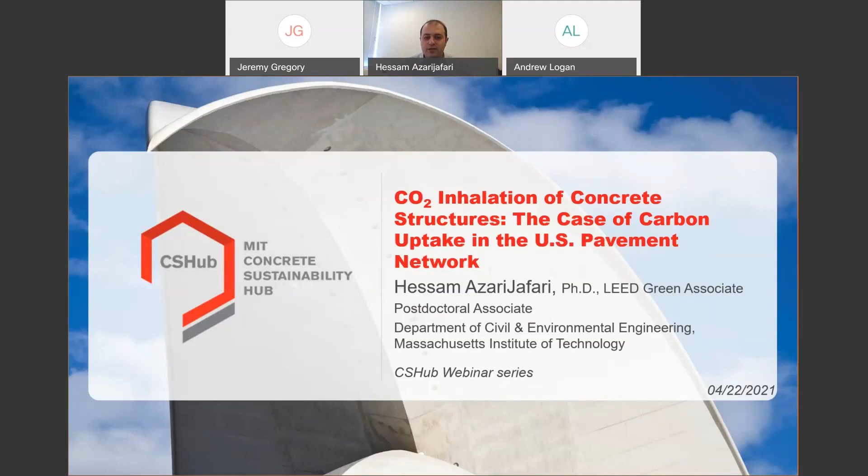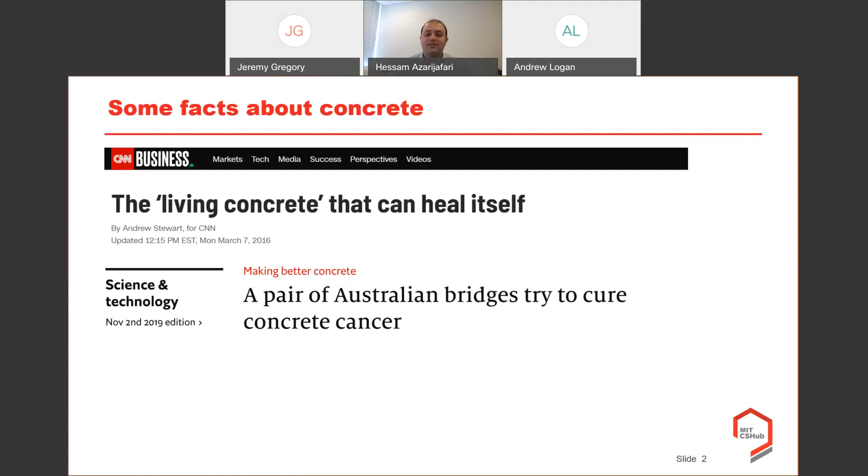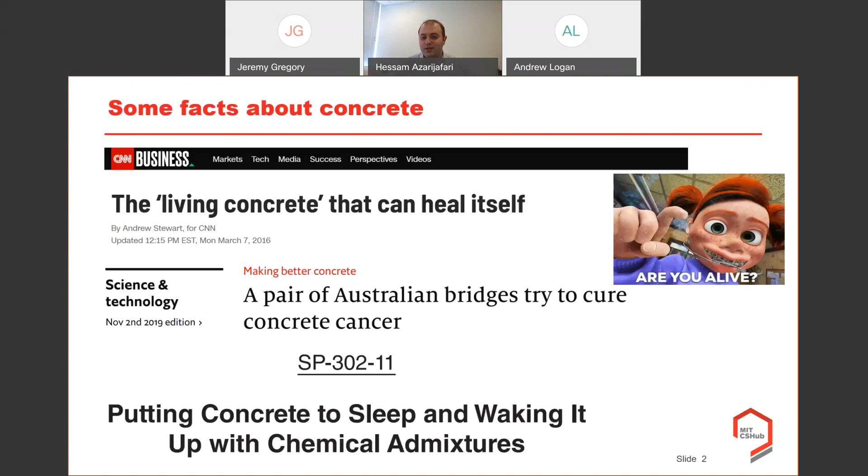I would like to share some facts about concrete with you. You probably saw in different news, press, or research publications talk about living concrete - concrete that can heal itself, the self-healing capacity we can give to concrete. Or, for example, concrete cancer, alkali-silica reaction, where concrete can catch cancer and we have to cure it, and some researchers are working on that as well. Or we can put concrete to sleep and wake it up with some chemical admixture. All these things make me think: is concrete alive? Well, if you want to hear my answer, it's yes.

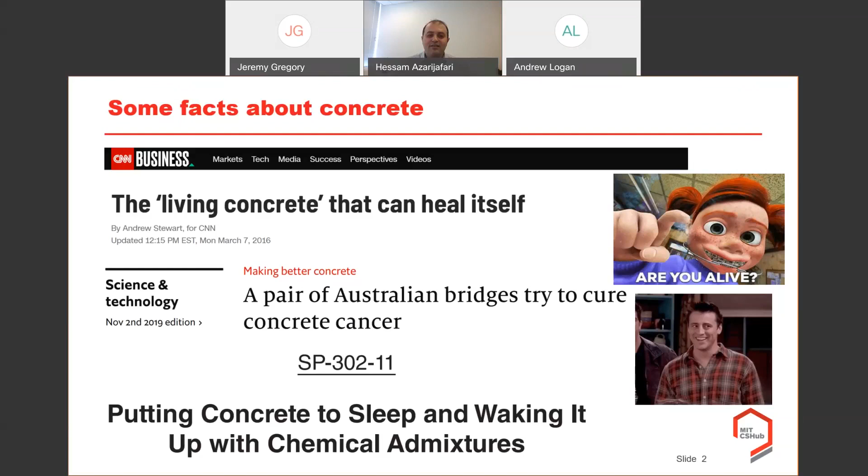When I saw all these things that are similar to many different creatures, I think concrete is alive, and concrete in fact breathes. How can concrete breathe? It can inhale some CO2. So today the topic of discussion is the CO2 inhalation of concrete structures.

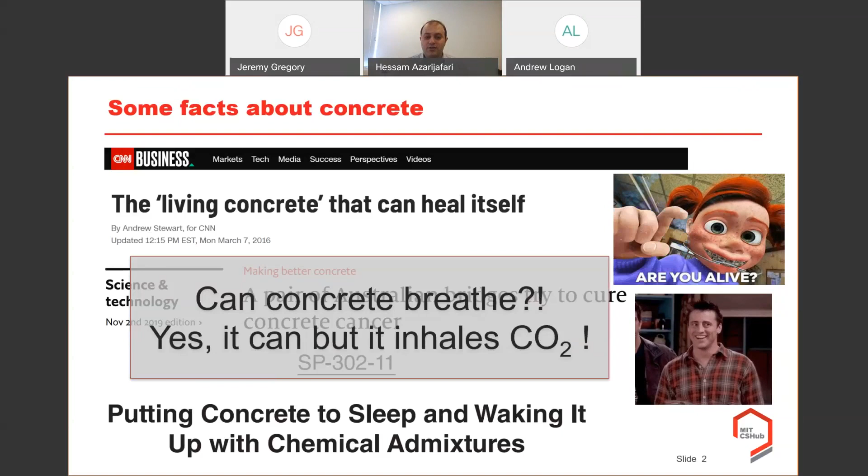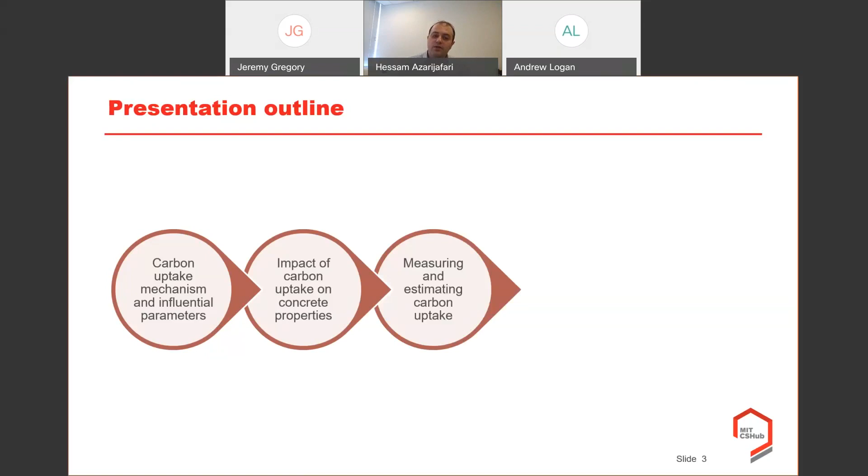And to do that, I would like to start briefly with our presentation outline. First, I will talk about the carbon uptake mechanism and the influential parameters on concrete carbon uptake. Then I will talk about the impact of carbon uptake on concrete properties, more specifically the hardened properties of concrete, and then different methods for measuring or estimating concrete carbon uptake, and how it has been accounted for in LCA - life cycle assessments - or environmental product declarations under the PCRs, more importantly the European PCR that has provided a guideline for that. We'll go through that as well. And at the end, I'll present the case study we've done based on this information, on the US pavement network.

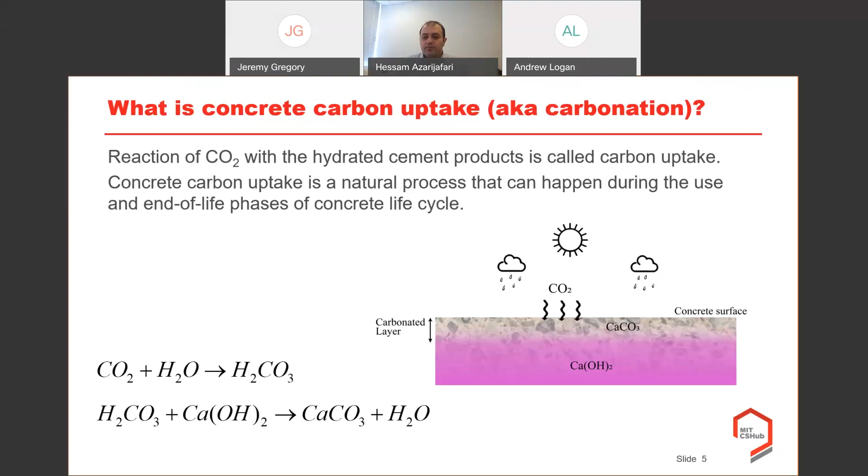Here I'm going to talk about different factors that can influence the intensity of the carbon uptake in real cases. These factors can be majorly divided into two categories: internal factors, like the concrete mix design, the constituents, the binder type and content, the water to binder ratio; and external factors such as the exposed surface area, the exposure condition, or the climate conditions. I'm going to bring examples from different studies that have experimentally investigated the impacts of all these factors on concrete carbon uptake and how it can differ from a control or plain concrete mixture.

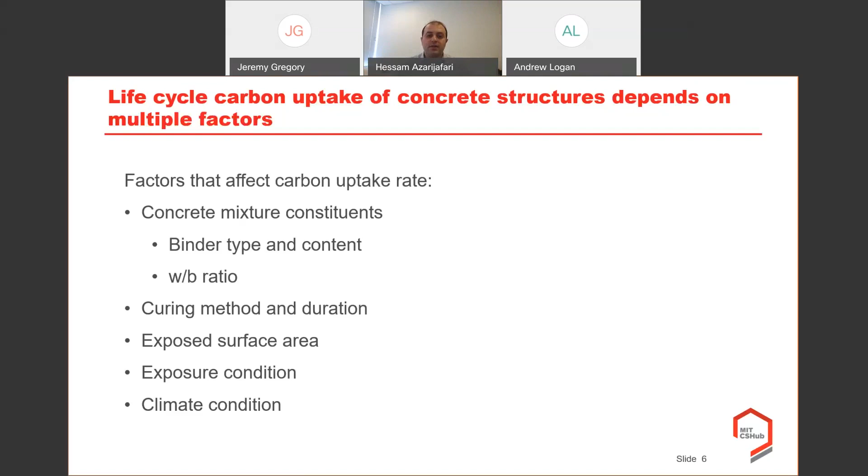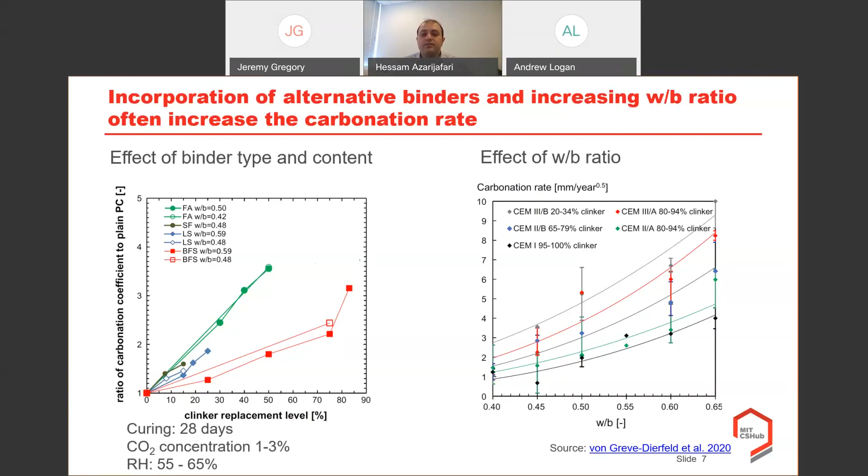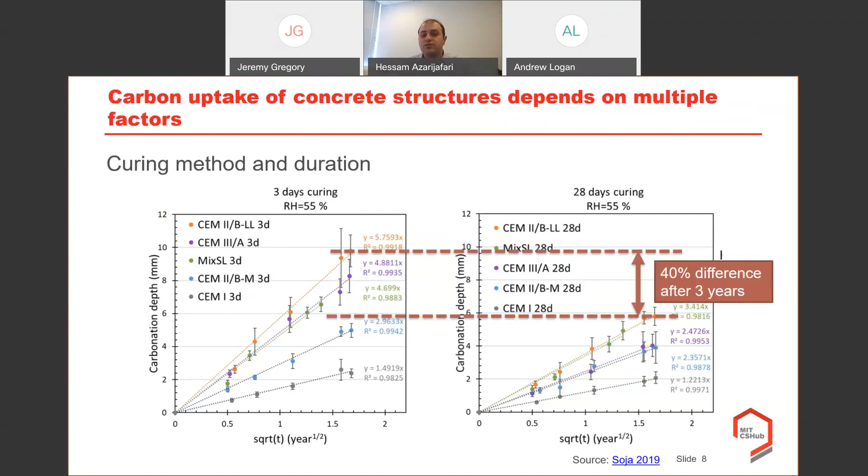What I would like to emphasize here is that in real cases, the CO2 concentration is quite different from experimental lab setups. More importantly, in rural neighborhoods and rural areas, the CO2 concentration is very close to 0.03%, as opposed to a lab condition that can be up to 0.1%, or in a metropolitan area or large cities, it can be up to 0.3%.

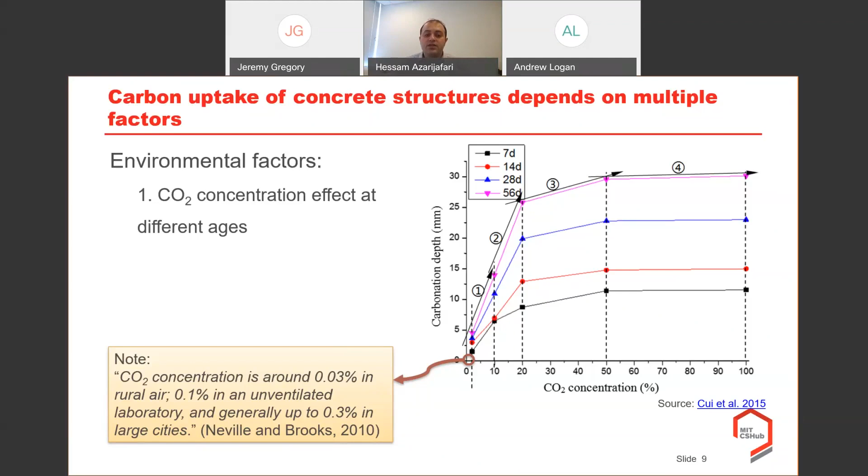So if you would like to have a good representative model for estimating the carbonation, we definitely need to set up our experimental test in these conditions, but for a longer period of time, because we know that at this CO2 concentration, we may have difficulties observing significant amounts of carbonation.

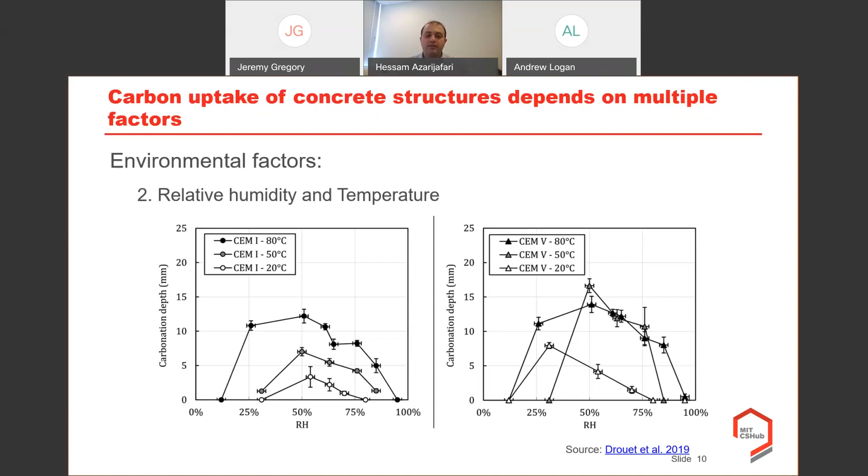So that was all about the important parameters that can influence the carbonation rate. The second part I would like to talk about is the impact of carbon uptake on concrete properties.

First, I would like to start with rebar corrosion in carbonated concrete and the susceptibility of reinforced concrete to rebar corrosion when we have significant carbonation. Concrete is a naturally alkaline material, with a significantly severe alkaline medium within it. The strongly alkaline nature of calcium hydroxide, which has a pH of about 13, very close to maximum alkalinity, prevents corrosion of the steel reinforcement by forming a very thin protective layer composed of iron oxide on the metal surface.

This iron oxide layer will be destroyed when the pH of the concrete falls below about 11. You can see that at pH 11, we may have 30% of the steel rusted, and this will increase significantly when the pH is lower than 11. What's important is that through the consumption of calcium hydroxide, the pH in concrete will drop significantly to around 9.

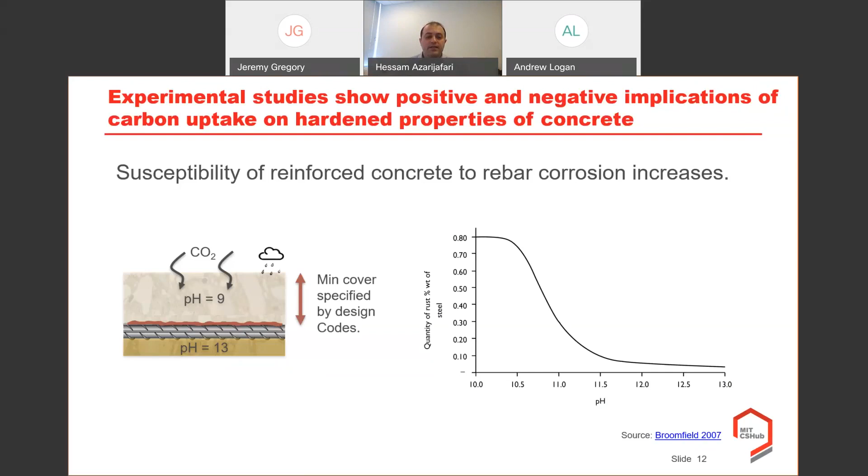That's why some design codes specify a minimum cover for concrete structures. But I should note that carbonation alone is rarely a source of concern for lifetimes below 50 years, unless concrete quality is very poor and workmanship is also poor, like insufficient concrete cover as we discussed. But for longer lasting structures, carbonation must be taken into account and modeled in rebar corrosion, along with the minimum cover specified by design codes.

The next effect of carbonation on concrete is the increase in compressive strength. You might be surprised to hear that once concrete is carbonated, its compressive strength will increase.

In this example, you can see that when specimens are not exposed to any carbonation in the atmosphere, versus 3-hour accelerated carbonation with a huge quantity of carbonation, and 6-hour, we can see an increase in compressive strength across two different water-to-cement ratios. This increase happens because of the water released from the reaction of calcium hydroxide, which helps the hydration continue.

On the other hand, calcium carbonate, one of the products of carbonation, is deposited in the small voids within the cement paste, so we end up with a denser binder in the concrete.

Microstructural analysis will show this better, comparing a normal concrete to a carbonated concrete. This curve belongs to a normal concrete with compressive strength of 30 megapascals, and this one is a carbonated concrete. You can see the pore size diameter: a smaller pore size diameter and distribution means a denser matrix and denser binder in hardened concrete. We're most interested in the region from 10 nanometers to 1,000 nanometers, where pore sizes play major roles in permeability and mechanical properties of the mixture.

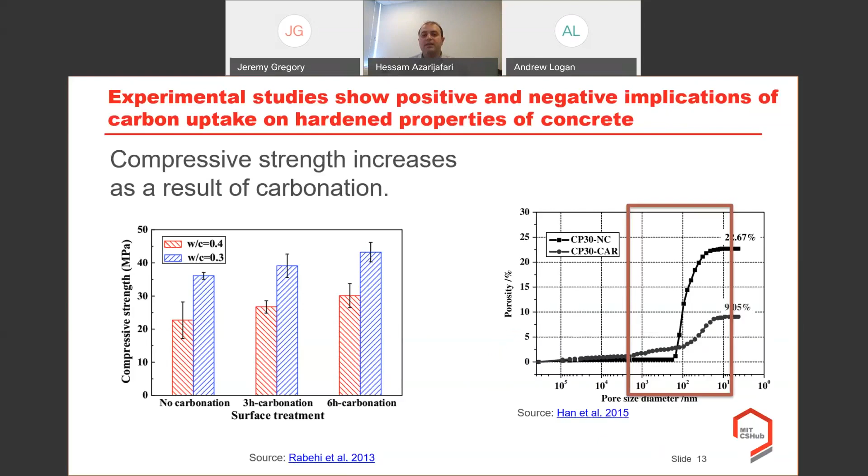The third and last property I'd like to talk about is concrete shrinkage. Concrete shrinkage will increase as a result of carbonation. When hardened concrete is exposed to carbonation in the air, the weight of concrete will increase, and there is an irreversible carbonation shrinkage.

We can see that carbonation increases shrinkage at intermediate relative humidity, similar to what we observed earlier: maximum carbonation occurs at intermediate relative humidity, and maximum carbonation depth also happens at the same rate. So let me briefly mention why this happens.

Previously, it was perceived that the dissolution and reaction of calcium and calcium hydroxide under the compression due to drying shrinkage would result in the formation of a stress-free calcium carbonate, as opposed to the compressed calcium hydroxide, and this would increase the shrinkage.

But now, recent studies along with many historical studies show it's more related to the decalcification of the mixture. Here on the x-axis you can see the ratio of calcium to silica reduction of the CSH, the calcium silicate hydrate, and here is the shrinkage.

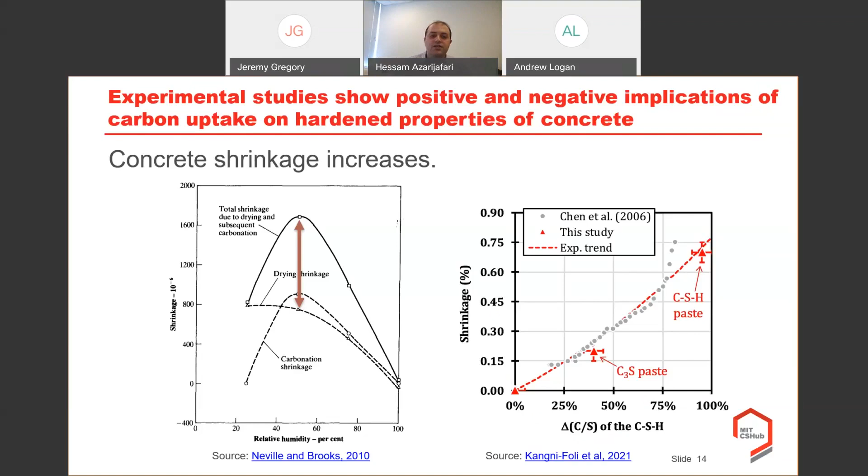We don't want to go through the details of the chemistry and calculations, because we just want to briefly know the consequences and impacts, both positive and negative, of carbon uptake on the hardened properties of concrete.

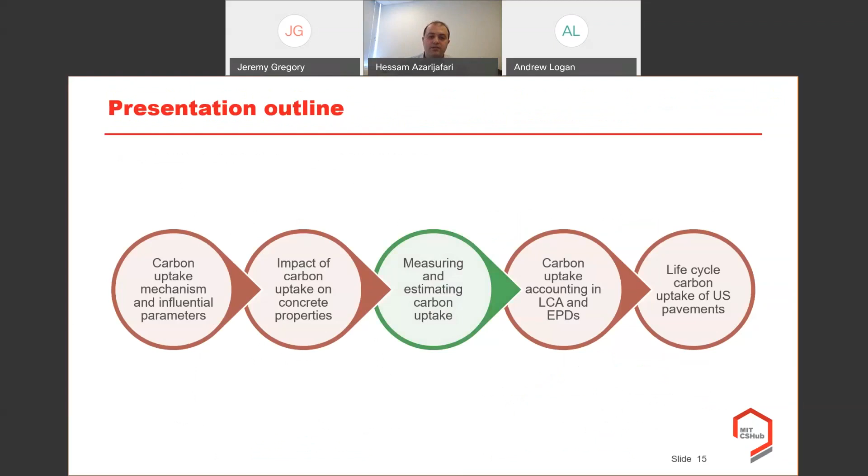We'll talk also very briefly about the measurement and estimation of carbon uptake based on different models. The most conventional method for measuring carbonation is spraying pH indicators like phenolphthalein or thymolphthalein, which can be used both on construction sites or in the labs.

For those not very familiar with this, the carbonation depth is determined by spraying freshly split surfaces with these pH indicators, and we can understand the depth of carbonation by the different colors observed.

The carbonated part that you can see here, with pH lower than 9, is colorless, but when the pH is more than 9, for phenolphthalein it turns pink, so we can guess that this part is totally carbonated.

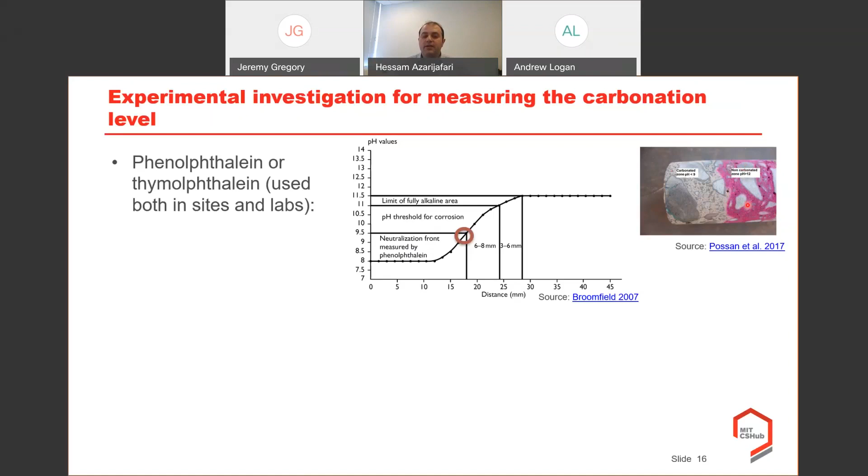What's important to note is that this boundary we observe here is a circle, but the pH threshold for corrosion to start is even larger, below 11 can be considered where corrosion can start. So maybe some of the pink part of this core can still be very susceptible to steel corrosion as well.

The second method is more advanced, using advanced analytical methods available in concrete labs, which definitely require more equipment. The method I'd like to talk about briefly here is thermogravimetric analysis.

In this method, briefly speaking, the hydrated cement is heated at a specific rate until reaching more than 1,100 degrees Celsius, and at different ranges of temperature increase, the dissociation of different hydrated products is measured. So as we discussed earlier, it's all about the calcium carbonate, right?

The calcium, when in the ranges of temperature that the calcium carbonate is dissociated and completely burned, we can estimate the mass loss attributed to the calcite or calcium carbonate, and compare it with a controlled, non-carbonated mixture to understand the amount of calcium carbonate and consequently the amount of CO2 absorbed by the concrete mixtures.

Again, this needs a lot of equipment, and once it comes with the aggregate, the aggregate also contains some calcite from limestone aggregate, making it difficult to distinguish the calcite in the concrete mixture from the calcite in the aggregate, especially in the interfacial transition zones. So we won't go into details, but I just wanted to introduce these methods that have been developed and used in different locations and scales for estimating the amount of carbonation.

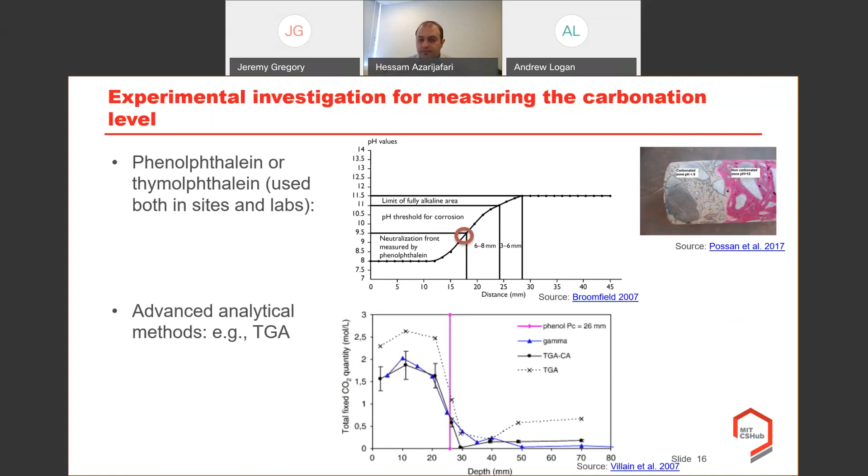Let's talk about numerical modeling. All the numerical modeling that I have known so far, or most of what has been published, follows Fick's first law of diffusion. As you can see in the equations on the left, the carbonation depth dc is a function of k, the coefficient of carbonation, and the square root of time.

And all the previously developed and reviewed equations for carbonation follow the same pattern. So we have t to the power of 0.5, the square root of t, and there are some differences in the estimation of the k value, because researchers observed that k depends on multiple criteria.

As we discussed earlier, the exposure condition - as you can see, some propose a different equation for sheltered or unsheltered concrete exposure conditions. Or for example, the water-cement ratio is another factor that concrete researchers have found makes a difference for the estimation of the k value.

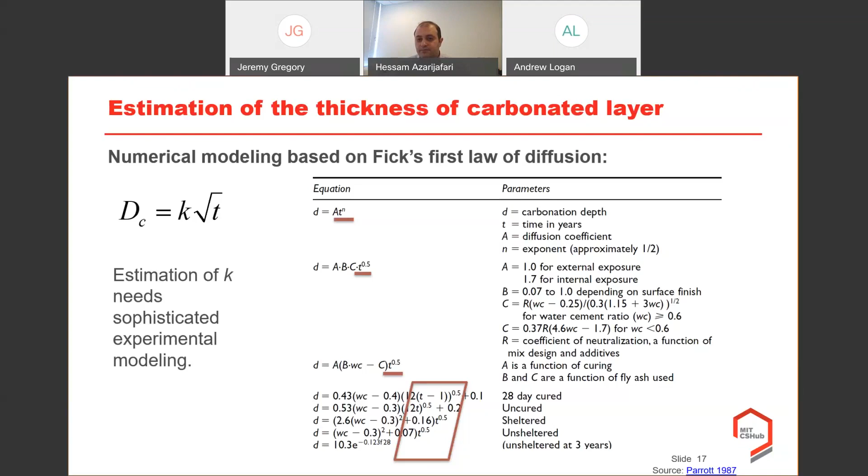Here, it would be a good transition to move forward and see how carbon uptake is accounted for in different LCA and EPD documents and the product category rules under these EPDs. So far, there is a standardized method in European standards.

15804 and 16757, for estimating the use phase, module B, of carbon uptake. And again, it follows the Fick's diffusion law. You have the coefficient of carbonation here to estimate the uptake during the use phase in terms of kilogram CO2.

This coefficient of carbonation is a function of the compressive strength and exposure condition in these standards, meaning there are predefined values for different compressive strength ranges and exposure conditions of the concrete elements that help us fill in and use the appropriate values for K, the coefficient of carbonation.

On the other side, we have the maximum theoretical uptake - the maximum amount of kilogram CO2 that can be absorbed by kilogram binder. Remember, the binder can be limestone, slag, fly ash, or Portland cement, which is multiplied by the quantity of binder that we have.

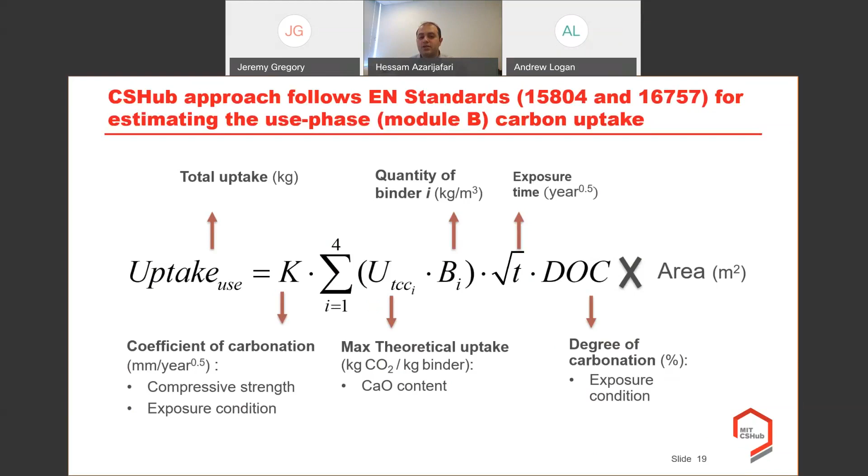So here in our center, the Concrete Sustainability Hub, we put together a small spreadsheet using the same methodology discussed in EN standards to quantify the use phase and end-of-life carbon uptake. I will discuss the end-of-life carbon uptake later, but I just want to give you a preview of the tool and the inputs needed to estimate the total use phase or end-of-life carbon uptake.

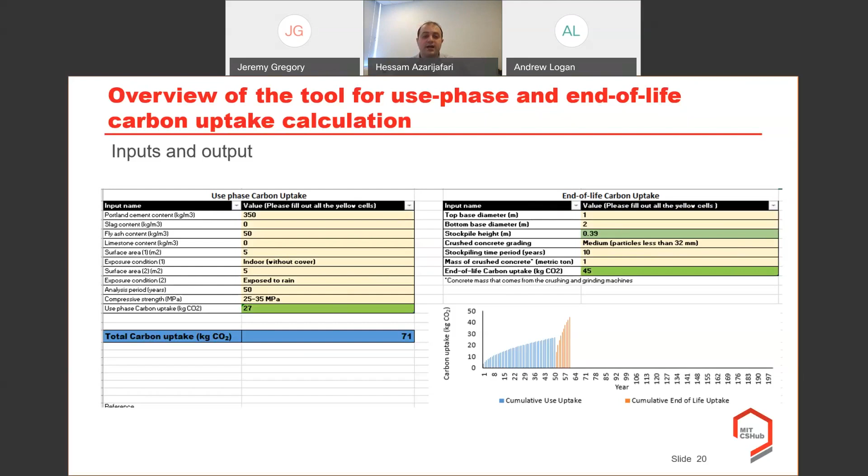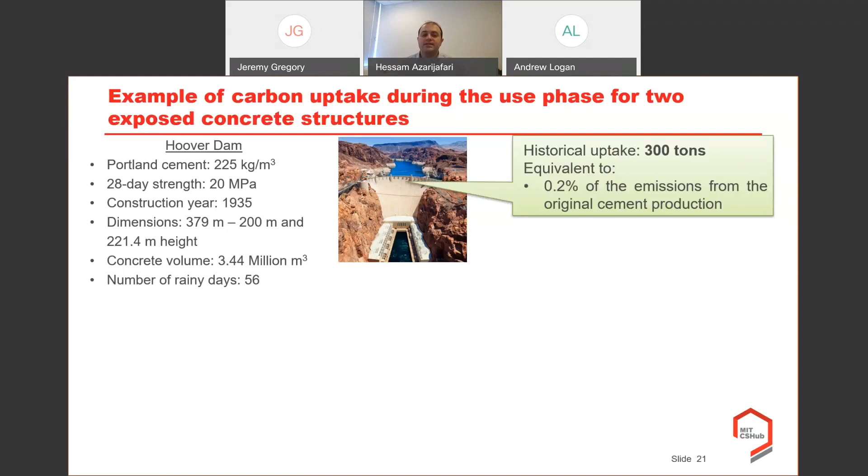So this is one example. The other example we used was Rudolph Hall at Yale University. It's an exposed concrete structure which was constructed in 1963 and follows the Brutalist architecture principles, and there's no coating on the outside or the inside of the concrete elements. Therefore we have two types of exposed condition.

So we extracted the site plan data using Autodesk Revit software, and we have a precise estimation of the exposed concrete surface area, both internal and external, which was around 10,000 square meters. We also had the concrete volume, around 7,000 cubic meters.

And based on the conditions, the number of rainy days that we had in Connecticut, we could estimate that the total amount of uptake since 1963 was around 125 tons CO2, which is equivalent to 5% of the emission from the original cement production.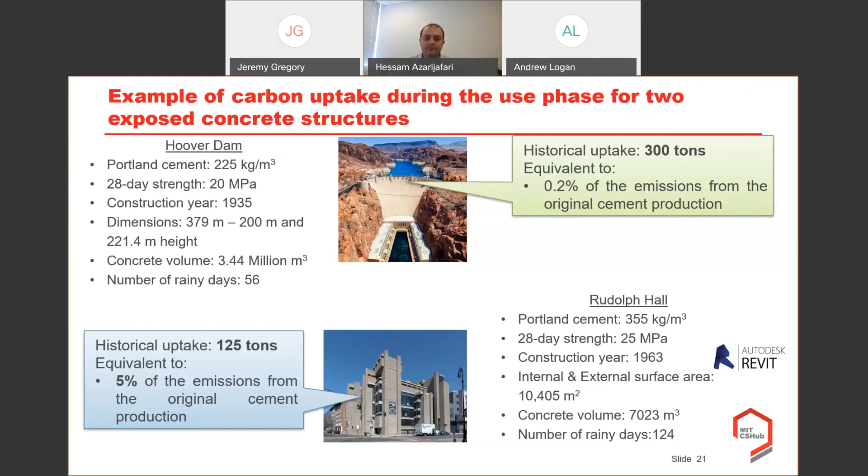So these are some calculations for the use phase carbon uptake of some concrete elements. But what is more important for us — what we have done and already published — is the life cycle carbon uptake of the US pavement network.

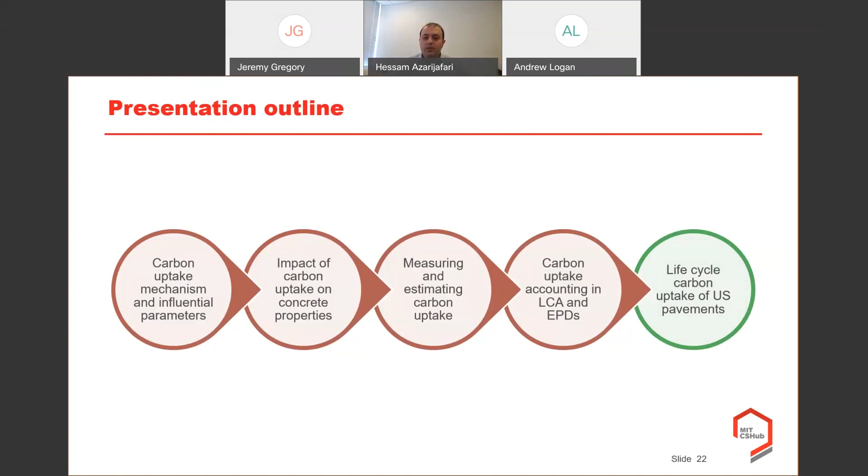For the US concrete pavement, it's a little bit complicated to calculate the carbon uptake precisely. First, the scope is so wide, meaning we have included all the concrete and composite pavements in the United States, and from one segment to another the road geometry, the climate conditions, and the concrete constituents are different. The concrete mix design and the practice and amount of binder, from West Coast to East Coast, is totally different.

The second factor is maintenance and repair actions. Once we apply maintenance and repair actions on concrete pavements, we are removing part of the concrete — for example, by diamond grinding a thin layer, which removes the carbonated layer — or we put a concrete overlay on top of the previously built surface. Therefore, the age of the surface becomes 0 again.

As you can see, when the surface treatment is applied, schematically here we have a small carbonation rate. When the age becomes 0 again, meaning we are applying diamond grinding, the carbonation will start accelerating again and will continue, following the Fick's diffusion law.

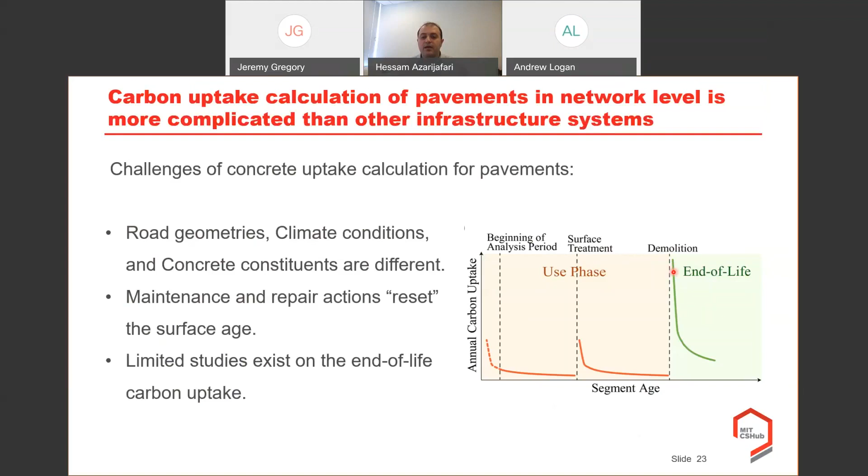To overcome these issues, we developed a data analytics and machine learning approach that will help us estimate the total amount of concrete required for concrete pavement, the surface area, and the deterioration rate, so we can predict the maintenance and repair of concrete pavements in the future based on practical maintenance and repair actions in different locations and regions of the United States.

First, we sampled some input data, like initial road conditions, and developed prediction models for deterioration and pavement age of the concrete pavements, in order to assess when and where maintenance and repair actions should be implemented.

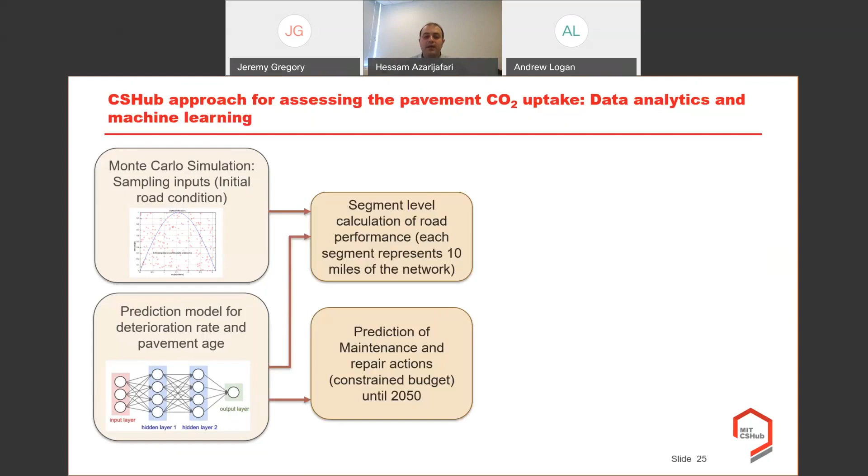Then we divided the whole United States pavement network into 10-mile road segments. Based on the prediction models, we have a rough estimation of the maintenance and repair actions based on the budgets that we predicted for each state at the state level until 2050.

Based on that, we had a good estimation of the concrete surface area in square meters, the concrete surface age—at what age the concrete segment is currently—and the demolished and newly constructed concrete volume, so we can have a good estimation of the kilogram binder in different locations.

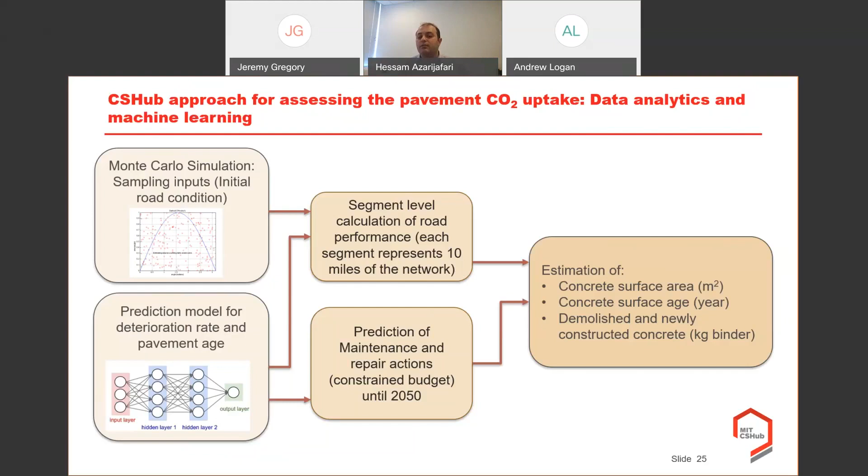This bottom-up approach of carbon uptake calculation starts from the pavement statistics as input contextualization. Then we have the individual segment assessments, and once we calculate the uptake during usage and end of life, we aggregate the results at the state level and nationwide level.

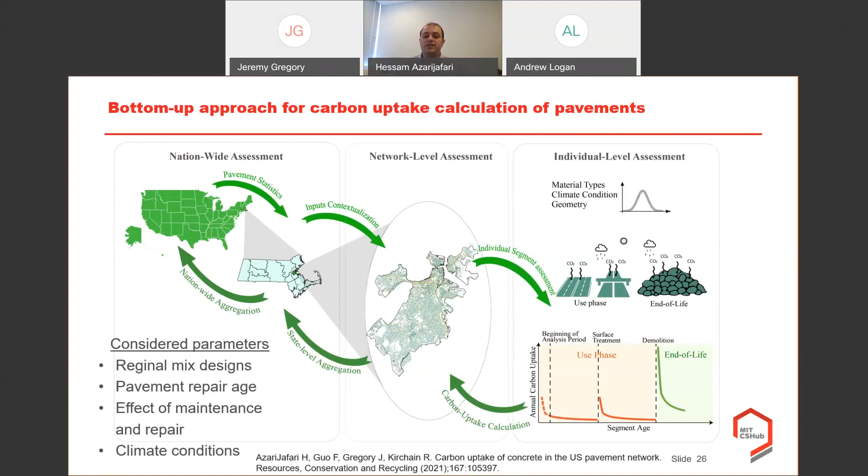What we considered here are the regional mix designs and how they vary from one state to another, the pavement repair age, the maintenance and repair actions, and the climate conditions in different locations of the United States. This is the approach we followed for the end of life.

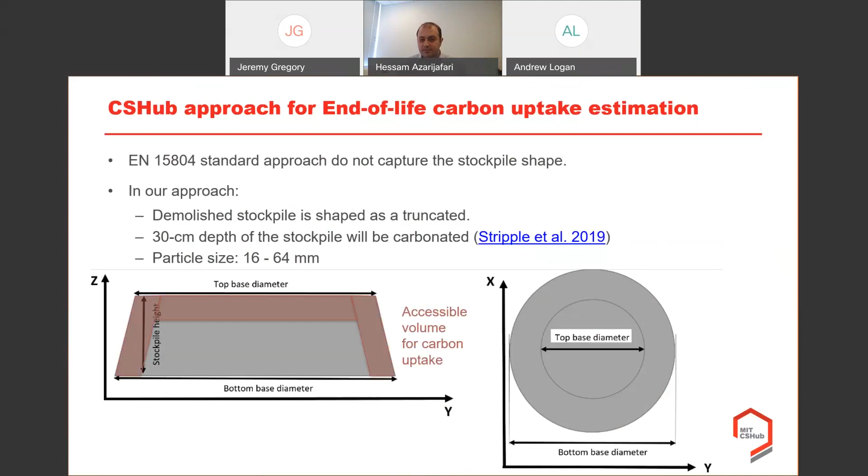So let's go see the results here. First, I'd like to share some segment-level results to show the extent to which the carbonation can differ from one road segment to another.

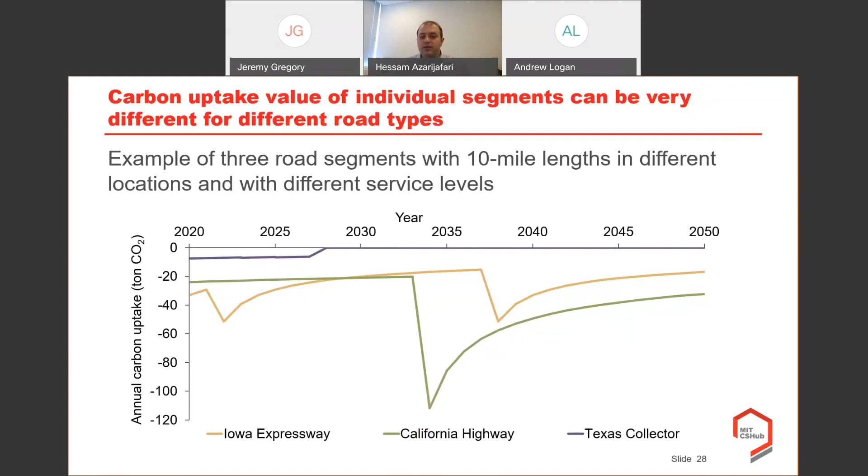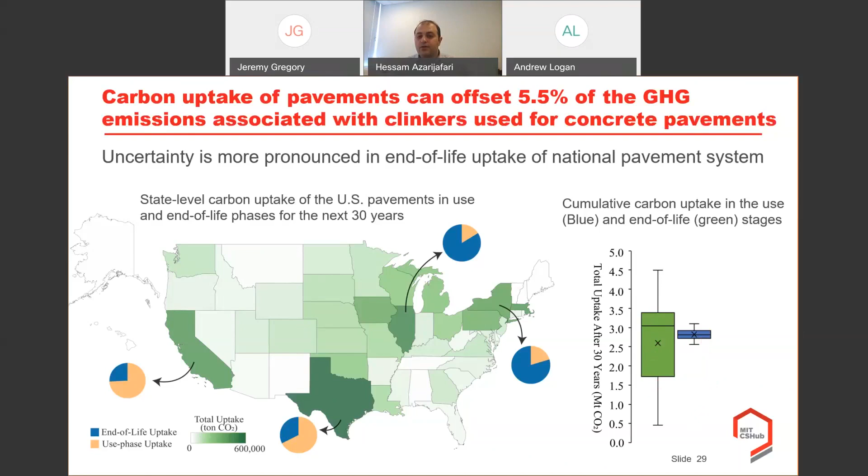However, we can see the uncertainty related to the calculation of the end-of-life uptake is quite huge compared to the use phase, and that's because of the geometry of the stockpile that we have.

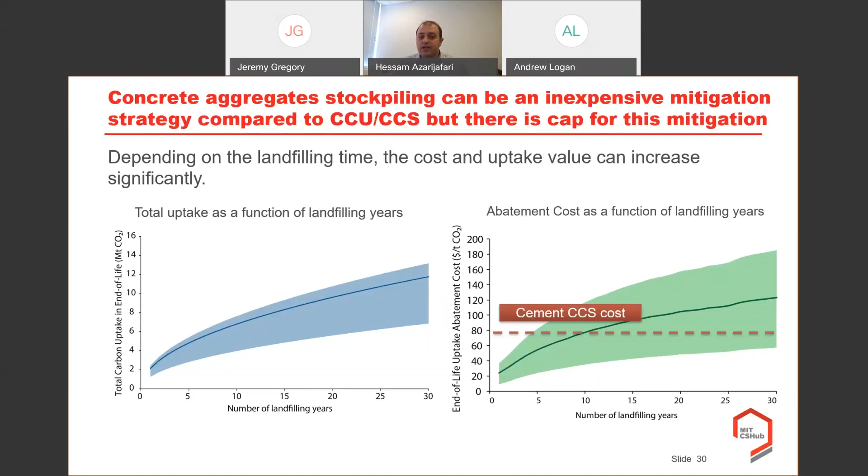And here is the current cement carbon capture storage cost that was reported in different policy reports, which is around $75 to $80 per ton CO2 captured. So for the moment, since this technology is still expensive and still under development, we can definitely consider the end-of-life uptake as a meaningful and cost-effective strategy to capture the CO2 naturally.

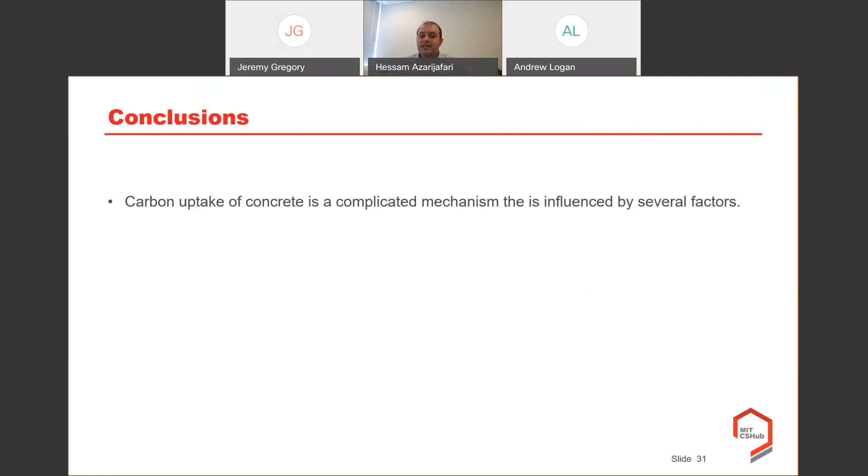So let's go to the conclusion. First of all, we found that the carbon uptake of concrete is a complicated mechanism, and it's influenced by several factors: the binder, and external factors like environment.

The second one, the US pavement network can absorb around 5% of the carbon emissions from cement production. The total amount of those whisker plot chart values corresponds to 5% of this total cement production emissions that we calculated.

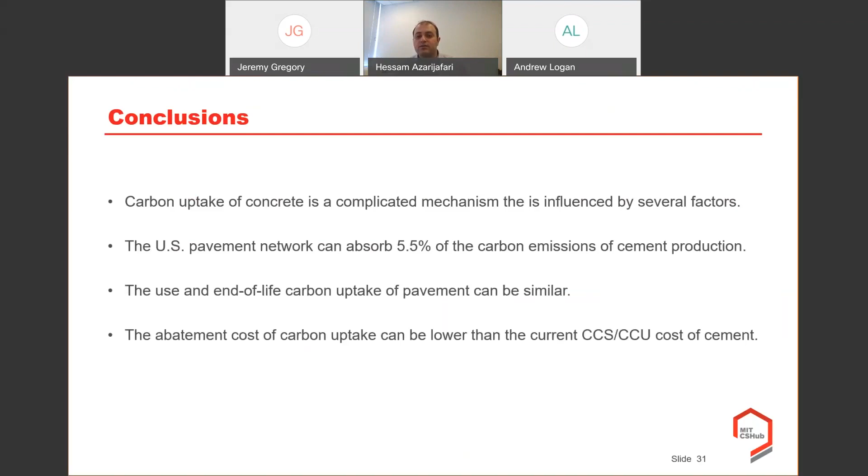The use and end-of-life carbon uptake of concrete pavement network can be quite similar and in the same range. And at the end, the abatement cost of carbon uptake can be lower than the current CCS or CCU cost of cement, those technologies that are implemented on cement and concrete industry.

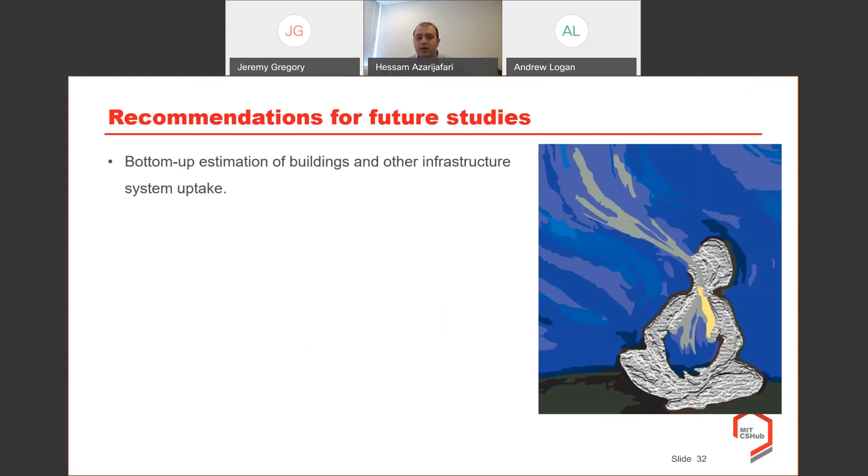So for future studies, we propose to apply the same bottom-up approach, or a similar bottom-up approach, to estimate the total carbon uptake of buildings or other infrastructure systems.

And we also propose to develop reliable models to include climate change impacts in the analysis, including the temperature fluctuations in the future, the precipitation changes, and the CO2 concentration in the small ranges that we discussed.

And the last part is the optimization of the carbon uptake. So for many different concrete structures that are not reinforced, like concrete pavements, the jointed plain concrete pavements that don't have any reinforcement except for the dowel bars, which are not majorly affected by concrete properties.

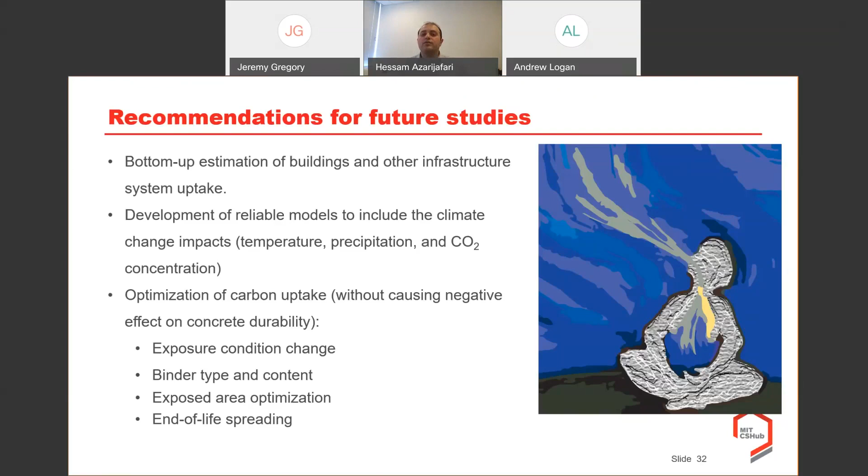And we don't see any negative effect on concrete durability because of the carbonation. We can consider and change the exposure conditions, the relative humidity part, or the binder type and content, or the exposed area of the concrete structure. This gives more flexibility for architects, and for end-of-life spreading, so we can leave demolished concrete for a longer period of time at end of life to increase the carbon uptake of concrete without compromising its durability.

However, we discussed that it's 5.5% of the emitted CO2 that can be absorbed by this concrete pavement that we have. Still, 94.5% of the emitted CO2 from cement production is out there. Therefore, we definitely need to implement and think about alternative strategies to reduce this 94.5% of emissions, or compensate for this amount of CO2 through different policies and strategies.

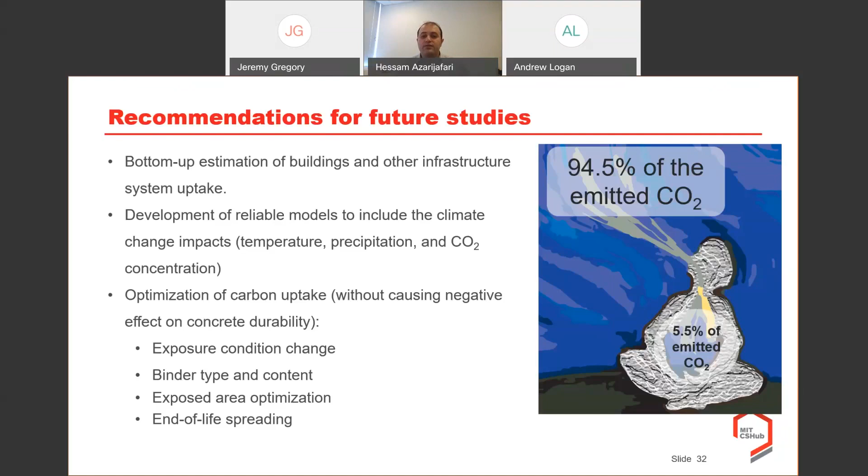Thank you so much. That's all I wanted to present today for you, and I'd be glad to take any questions as well.